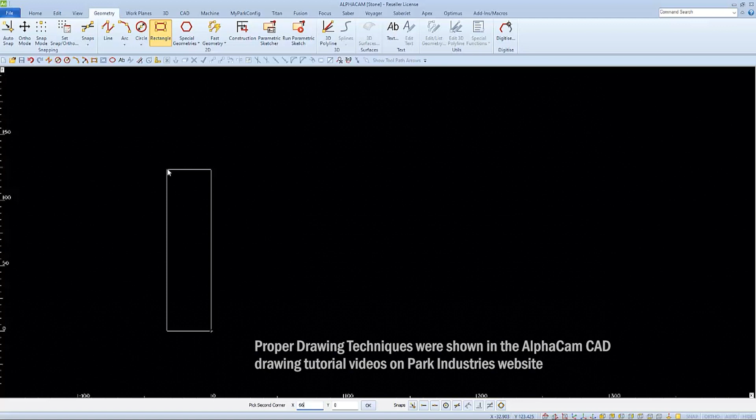I'll draw the parts first, so I'll choose to draw a rectangle, making two rectangles 66 by 26. I'll start the first corner at 0,0, since that's the easiest way to draw it, then type in my dimensions, 66 in the X and 26 in the Y. Then I'll move this part over to the left past the X0 point.

The bottom left corner of the slab must be drawn at X0, Y0. So I'll choose Move, select my part and Finish, then click somewhere on it for a base point, move it to the left past the 0, and click to set it down.

I'll just use Copy to make my second part, and again I'll click and eyeball it into a location right above the other one.

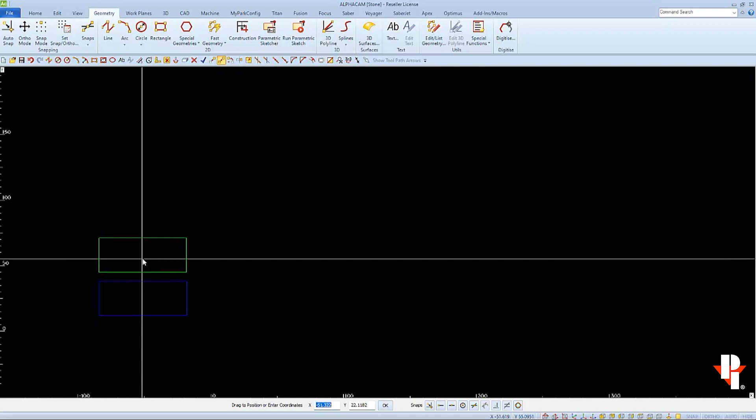I also need to draw a slab, which is a rectangle. That has to start at X0, Y0, and then I can type in the dimensions of the slab, 124 in the X and 68 in the Y.

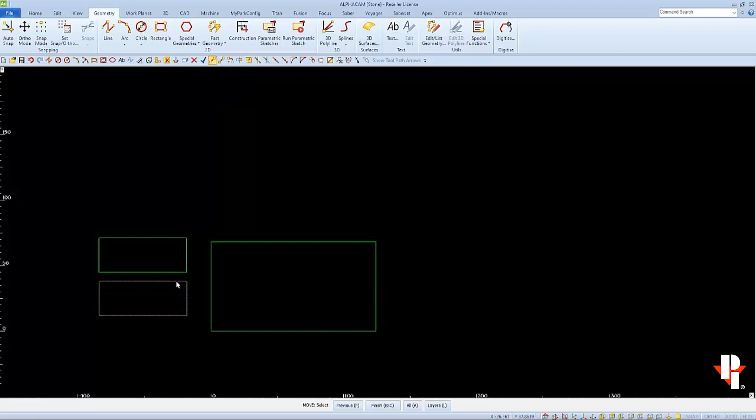Next, we'll move the parts onto the slab. I'm going to move the first part accurately into the bottom left corner of the slab, a half inch away from the edges. So we'll choose Move, select the rectangle and Finish, then use the endpoint snap to select this part by its bottom left corner, and I can set it down at 0.5 in the X and 0.5 in the Y.

It's recommended to leave a little extra material to cut so that the blade doesn't deflect and you get a nice, smooth saw cut for a finish.

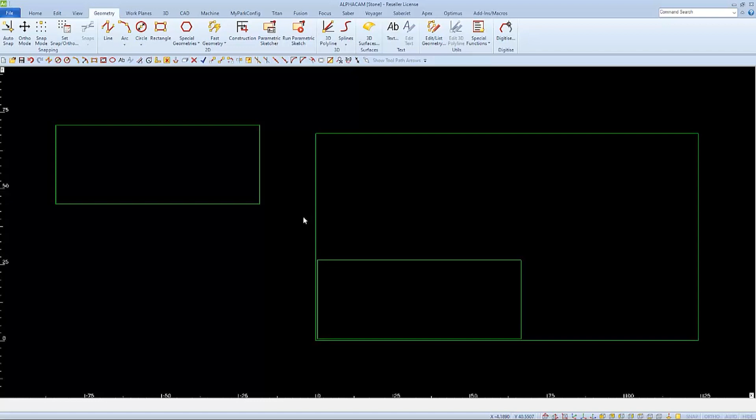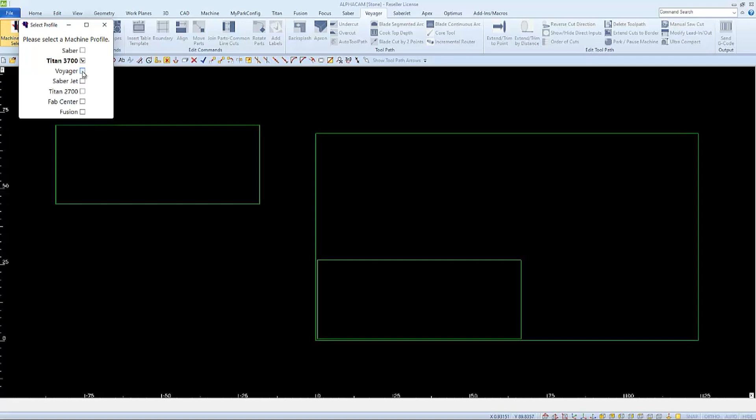I want to move this other part above my first part on the slab. The easiest and most accurate way to do this is to use the Join Parts function from my Voyager tab. If all functions are grayed out on your Voyager tab when you open it, activate it by going to Machine Profile Select and checking the box next to Voyager. This will enable all functions, including Join Parts Common Line Cuts, which we'll choose.

The only setting that we should have selected is Blade Kerf, and then we'll follow the command prompts. My objective is to get this part over onto the slab right above this part, separated by the blade's width.

When it says select the edge of the part to be moved, I have to click closer to one end of the edge or the other. In this case, I'm going to pick closer to the left side of this bottom edge.

And when the command line says select the edge of the part to align it to, I'll not only select this edge, but closer to this end of this edge. We can see not only are the parts separated by the thickness of the saw blade, but the ends are also aligned so that one saw blade cut will cut both parts.

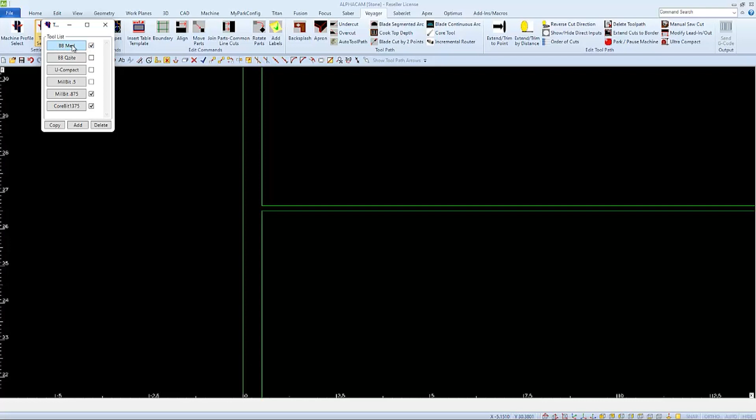This distance of the spacing between the parts comes from the properties of the blade that we have selected. We can view or change this setting by going to Tool Select and selecting the blade that is active with the check mark, and here we can see the blade kerf is set.

At 0.135. So now that we have the parts laid out on the slab, we're ready to make a program. We can apply the saw blade cuts by using the Auto Toolpath icon on our Voyager tab. In this window, we can confirm or change settings.

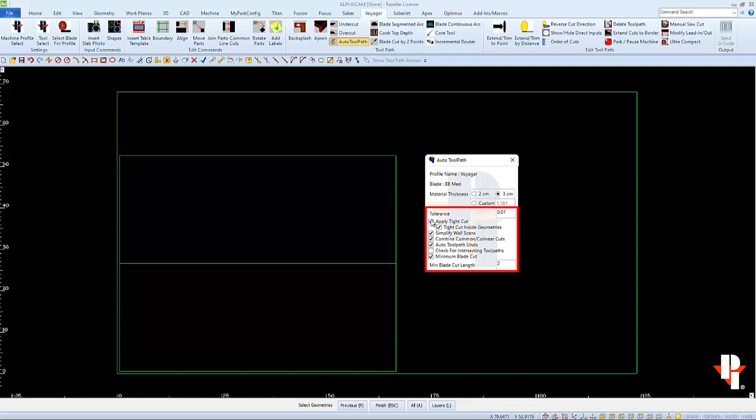The important settings are at the top. We're programming the Voyager, we're using the BB medium blade, and the material thickness is 3 cm. This bottom section is more for preferences, and we'll talk about a few of them as we go along. For right now, you can set it up the way I have mine.

We're prompted to select the geometries to cut, so I'll select my 2 parts, and then I'll finish to automatically have all my saw cuts applied. These blue tool paths represent the middle of the bottom of the blade, and the arrows will show you the direction of the cut if you have them turned on above.

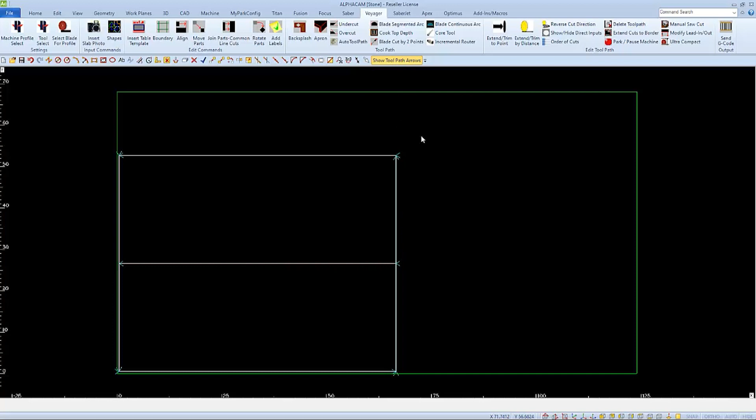Another thing I'd like to do in this first example is save the right side of this slab as a pre-cut for another job. I can do that by extending this saw cut all the way to the edge, which is easily done with Extend Cuts to Border. Follow the command line.

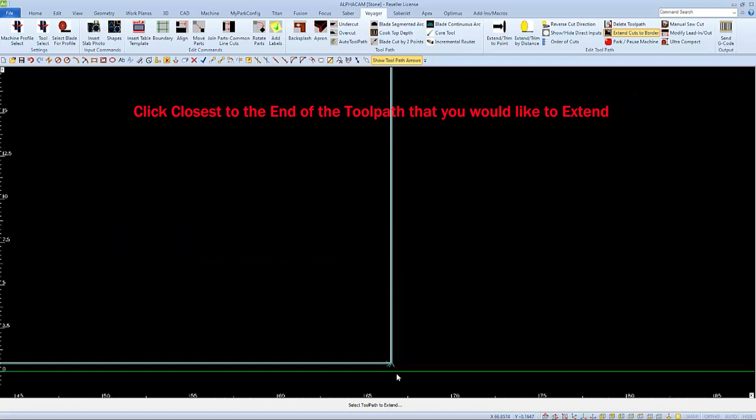First, select the border, which is the edge of the slab. Then you can select the toolpath to extend, and select which end of the toolpath you want to extend. I can click on this end to extend this way, and this end to extend this way.

After extending all the cuts we wish, we have a good program that could be run at the machine. In order to run it at the machine, we'll first need to save it as a file name, which will become the program name.

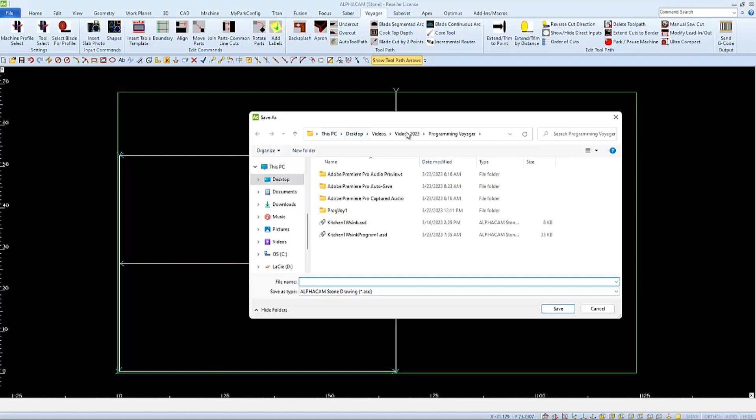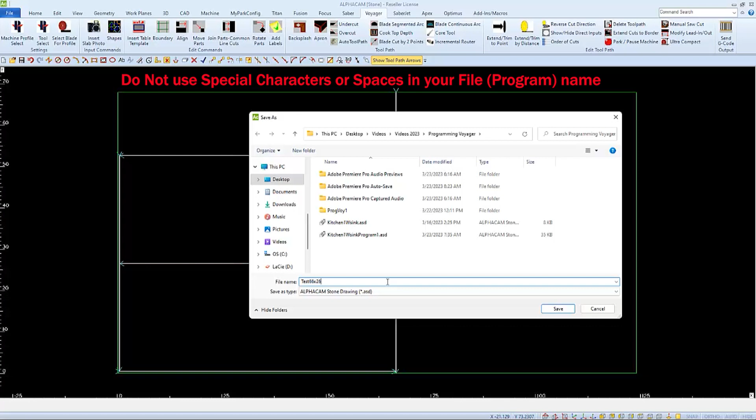Save your program drawing into a dedicated location. I've created a Voyager program folder to save mine in, and I'll just name mine Test 66 by 26. Do not use spaces or special characters in your file name.

When we click Save and OK, our drawing now has a name, which will become the name of the program. If the Voyager is connected to the network and all set up and ready, a program will be created and sent to it when we press the Send G-code button.

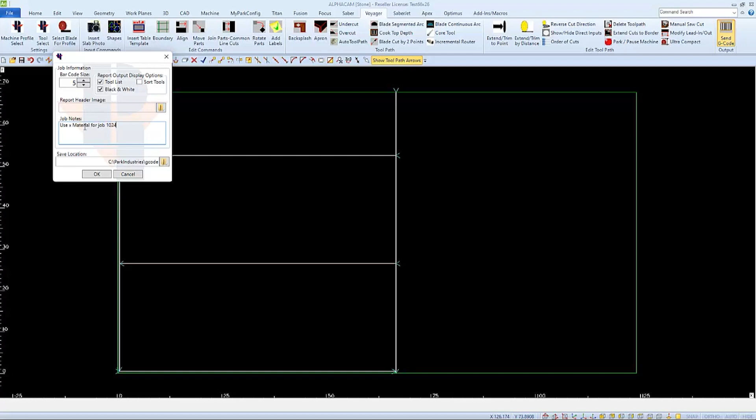Here you can add job notes if you wish, maybe what material to use and for what job number, which will be displayed on the job sheet when you press OK.

We'll see the program name, which is also displayed as a barcode, which we can scan to load the program at the Voyager to run it.

We also see an approximate runtime. This program is a little over 5 minutes. This is often printed off and brought to the operator to ensure they run the correct program.

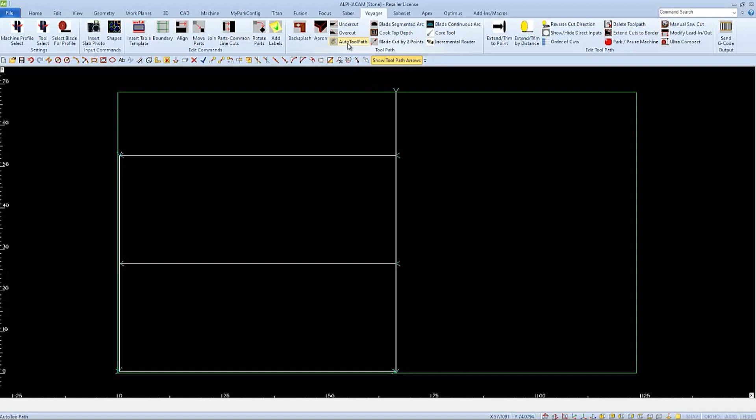Let's make another program. This time we'll add 2 more of the parts for a total of 4. We'll start by undoing the toolpaths that we have for the 2-part program. This is easily done by clicking on the Auto Toolpath icon, because we have Auto Toolpath Undo selected. So now, when we click on Auto Toolpath, it undoes all the toolpaths that were already applied.

Now I can easily make 2 more copies of the part and set them off to the side to make a similar program with 4 parts instead.

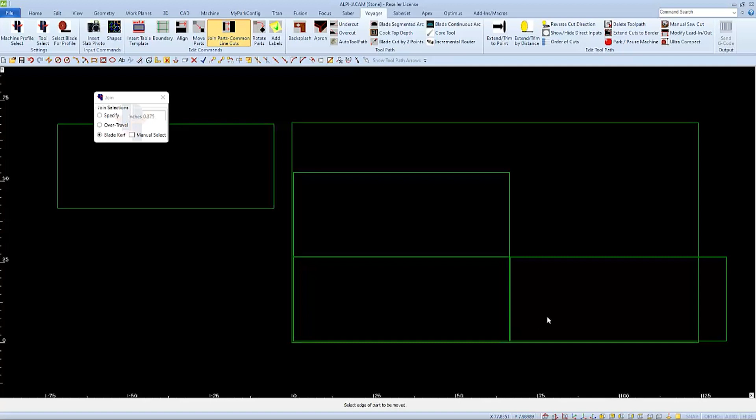I'll use the Join Parts-Common Line Cuts feature again to move the parts onto my slab, choosing to keep them separated by the blade kerf. As prompted, I'll select the edge of the part to be moved, clicking closer to one end, and then select the edge of the part to align it to, again selecting closer to one end. As we see, the part doesn't fit on our slab in this orientation.

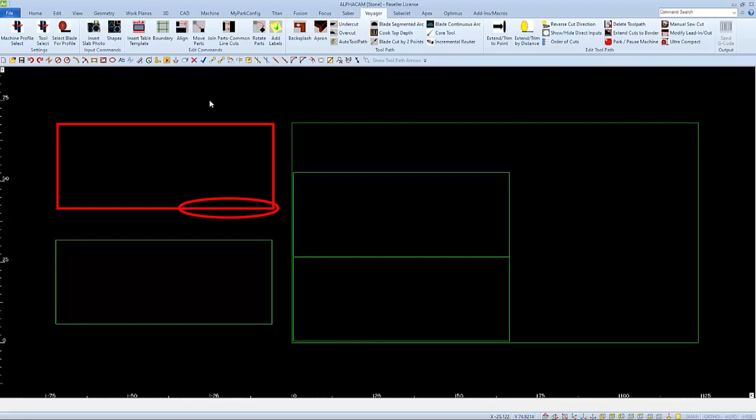So I'll undo this move. I can either pre-rotate the parts, or rotate them while using my Join Parts-Common Line function, by selecting the proper edge and end of the part I want to move to the end and edge of the part I want to move it to.

So I'll choose Join Parts-Common Line Cuts, and leave just Blade Kerf selected, and pick this end of this edge of the part to be moved to this end of this edge to align it to. For the next part, I'll choose this end of this edge to go to this end of this edge.

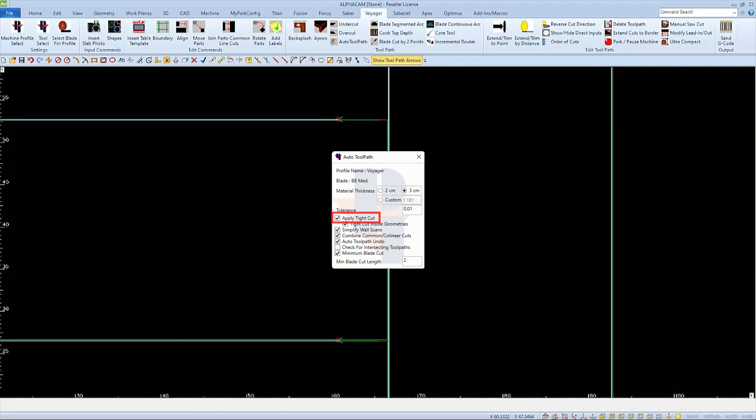I'll finish so that I can choose Auto Toolpath, then select the 4 parts and finish to create another program. Like before, all the toolpaths are automatically applied, including these 2 tight cuts since we have them selected in our Auto Toolpath menu. This is where the blade will stop its X or Y travel and plunge into the table so it can cut closer to the end of the part.

I'm going to take us to a side view drawing that I made so we'll have a better visual and understanding of what happens here. The beginning or end of the blue arrow represents the middle of the bottom of the blade. And we normally see this arrow go all the way to the end of our part, which completes our cut.

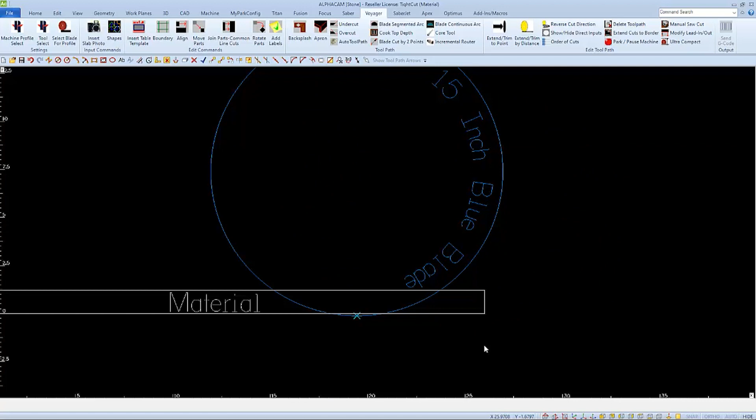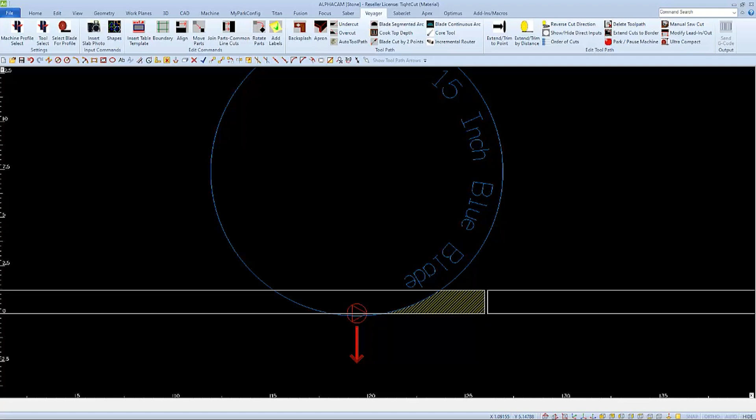But if there's another part next to it, like we have in our current layout, the blade would cut into that. So therefore, it has to stop short, which would leave an amount of material that wasn't cut. This red symbol of a triangle inside of a circle represents a tight cut. A tight cut will plunge the blade into the table so that it will cut considerably closer to the end

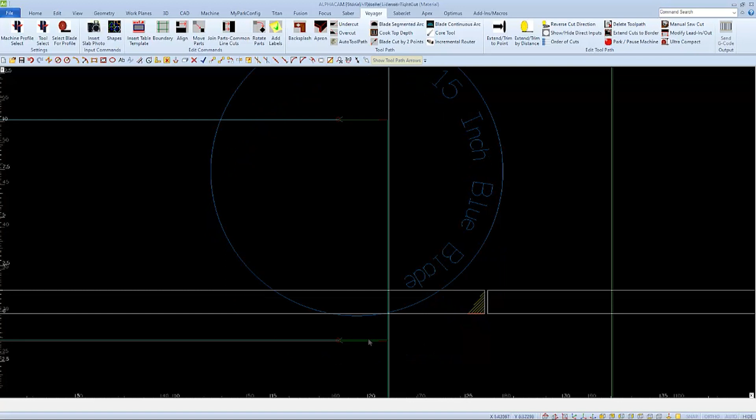of the part. With the parts close together, like we have, there still will be a small portion that doesn't get cut all the way through. This is represented with a red line. So when we see red lines after we've auto toolpathed, it is showing what the saw blade was not able to cut. It's usually a small amount if it's on a straight edge like this one.

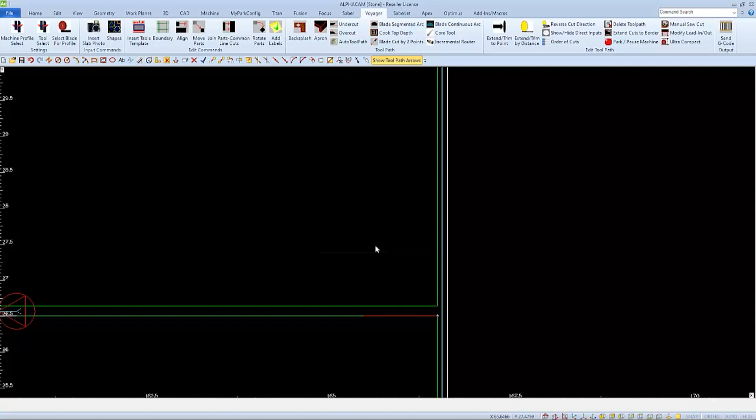I'll measure the distance from the end to the end, and it's a very small distance, less than 1 1/8 inches. And if we ran the program like this, we would have to manually finish the cuts. But there are a few different ways to change the program so the Voyager will cut through for us. I'm going to move the 2 parts to the right by about 1 1/8 inches since I have extra room over on the right side.

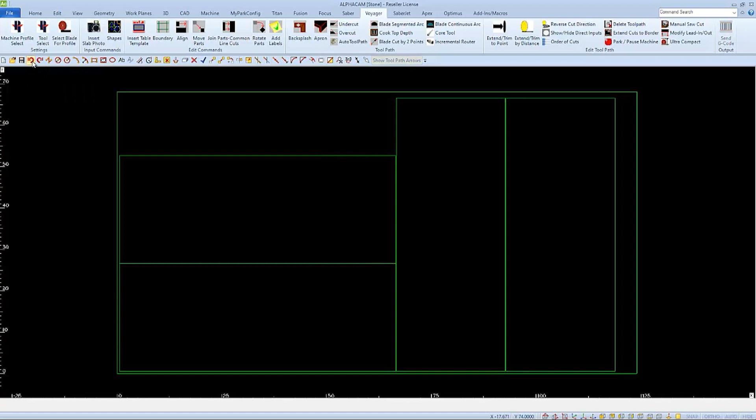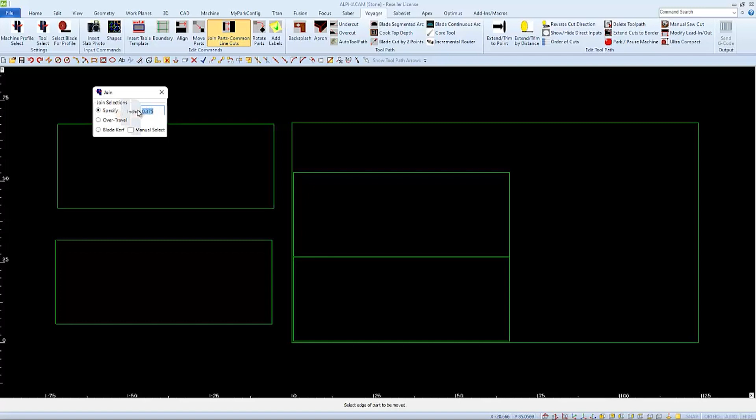In order to change a program, I first have to remove the cut paths. I'll choose regular undo this time since it was the last thing I did. And I'll press undo twice more so the last 2 parts are back alongside the slab. And this time, when I use Join Parts-Common Line Cuts, I'm going to select to specify the distance between parts instead. The distance we measured was just under 1 1/8 inches, so I'll use at least that much.

And like before, I'll follow the prompts. I'll select this end of this edge to be aligned to this end of this edge, which still left the bottom edges aligned and also left us a 1 1/8 inch gap. This next part, I'll switch back to the blade kerf so the 2 parts will share one cut.

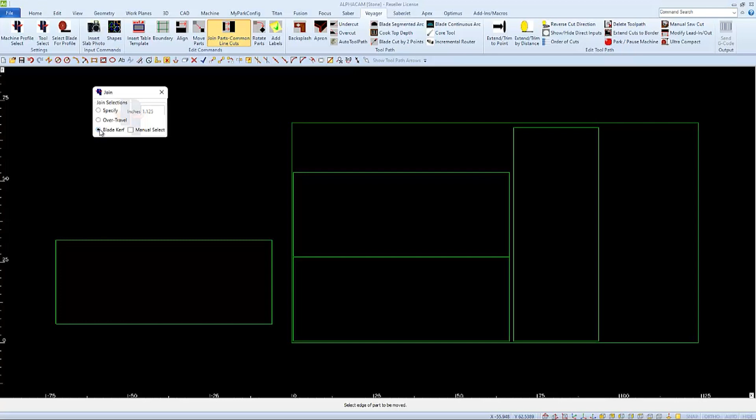Following the prompts, I'll select this end of this edge to go to this end of this edge, to align these 2 parts as they were before, a saw blade's width between them and aligned at the bottom. And we can make a new program by choosing Auto Toolpath, selecting the 4 parts, and then finishing. And as we hoped, these red lines are gone, and since there's no red lines in our entire drawing, it means all 4 parts were completely cut through.

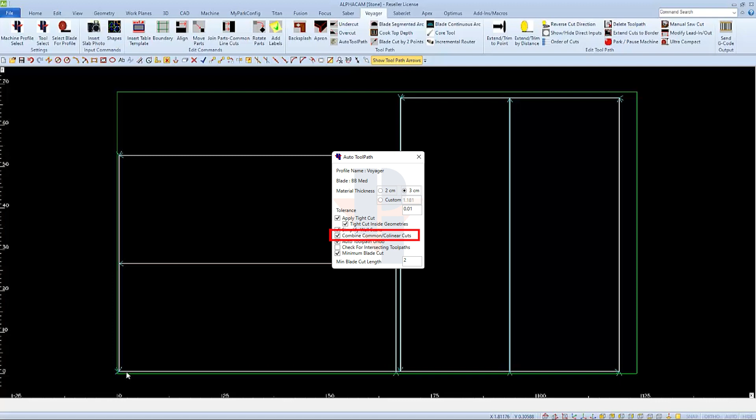And this is a perfect opportunity to show what Combine Common/Colinear Cuts does when it's enabled. It made one common cut across the bottom of all 3 parts rather than making 3 individual saw cuts. And with them all applied, we can go extend cuts to the border if we wish. First select the border as prompted, and then select the end of the toolpath to extend to the border.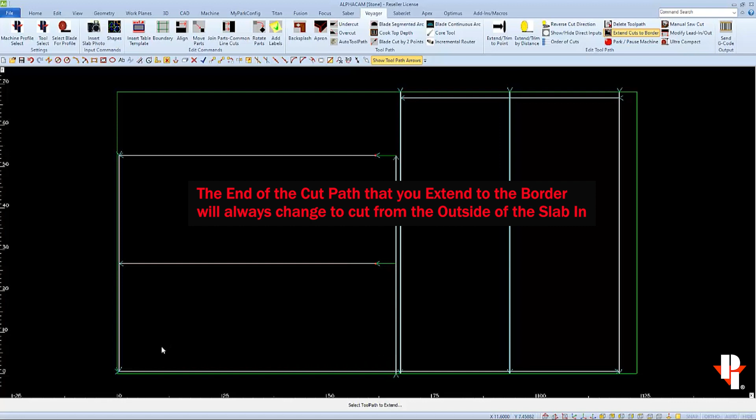And if you click a toolpath randomly a second time, it will automatically extend the other end, which may come in handy sometimes when you want to extend both ends just by double-clicking on the toolpath. But be very careful and select the correct end if you're only extending one end so it doesn't go across a good part. And don't extend the end of a toolpath that has a tight cut applied, or it will remove it. So let's save this file as a different name so we can complete and send the program.

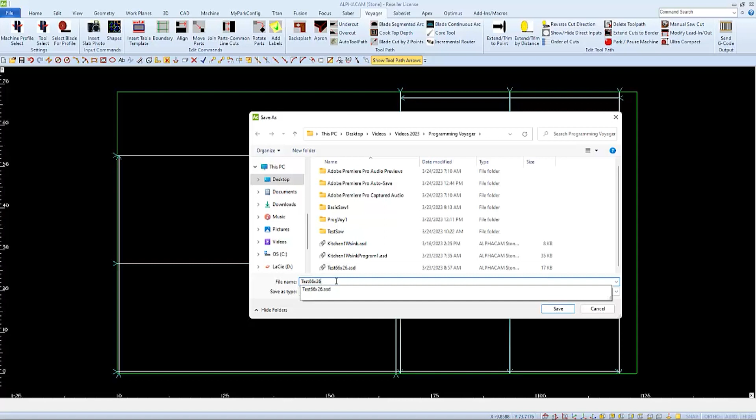I'll just use the name test 66 by 26 and add quantity 4 to the end. And now we can output the program under that name. And you can type notes if you wish before you click OK to make the job sheet. It may take a minute to generate this job sheet, especially if it's the first one.

And here, like before, we can see the approximate processing time, a picture of the layout, and the name saved as a barcode across the bottom. Paying attention to the orientation of your parts can increase the yield and reduce runtime.

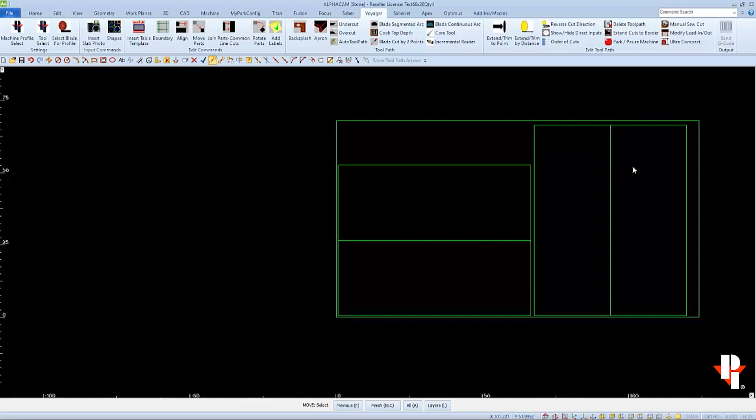I'm going to change the layout of these 4 parts for what I believe is the most efficient. I'll undo the toolpaths, and then I'll move all the parts off of my material. I'm going to place all 4 of my parts with the vertical orientation like these accurately on my slab.

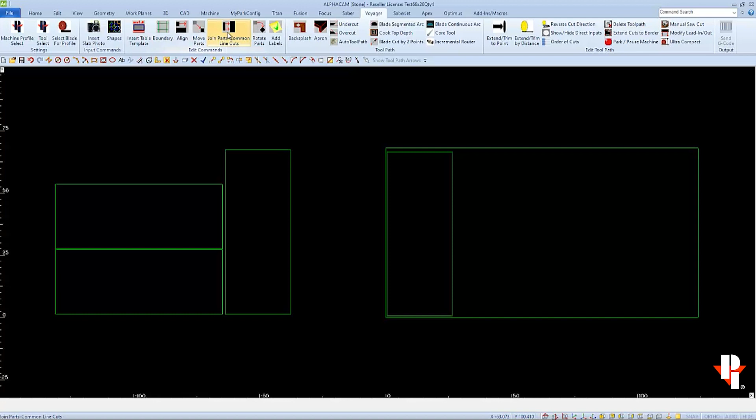I'll start by choosing Move, selecting one of the parts, and then grabbing it at the lower left corner as the base point and setting that down at 0.5 and 0.5. And then I'll use Join Parts Common Line Cuts to move the other 3 parts in a vertical orientation separated by the blade's kerf. I'll select this end of this edge and align it to this end of this edge.

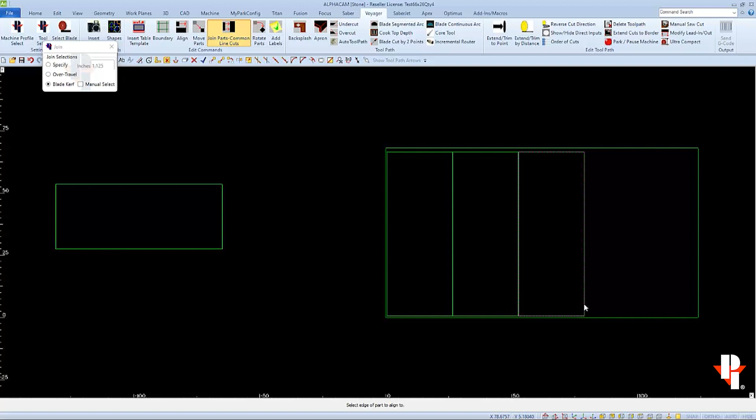And then I'll select this end of this edge to align it to this end of this edge. And finally, this end of this edge to this end of this edge. And like before, I'll apply my toolpaths by selecting Auto Toolpath, selecting all 4 parts, and then finishing.

With all the saw cuts applied, I can extend them to the border. Choose Extend Cuts to Border, then select the border as prompted, and then the toolpaths I wish to extend. I'm clicking twice on each of these vertical toolpaths to extend both ends to the border. And there are still some cut paths that I want to be particular and only extend one of the ends.

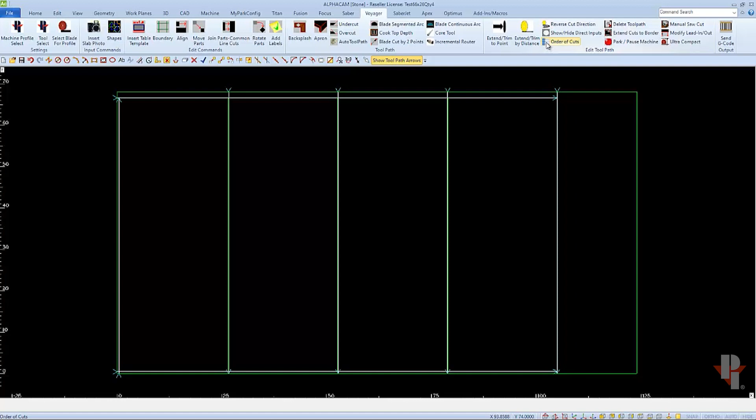Another thing we can do is view or change the order of the cuts. If we turn on Order of Cuts, we can view them in this Operations panel. You may have to expand Operation 1 to view the saw cuts within it. And the cuts are displayed in the order that the Voyager will run. You can view the order by clicking on the first saw cut, and you should be able to see it change color on your screen.

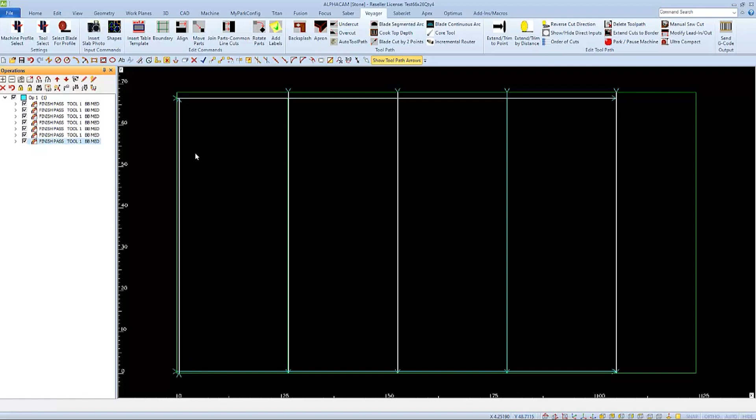And you can either click on the second one or start pressing the down arrow key on your keyboard to view the order of the saw cuts. You can also change the order. I'm going to change the order to cut the long edges of the parts first. And then I'll order the vertical cuts from left to right.

First, I'll find the cut by going to Find, and then as prompted, I'll pick the cut from my drawing. This highlights the cut in my Operations panel, and I can use the red arrow to move it to the top. And I'll repeat this process. Find and select the cut, and when it's highlighted, I'll move this one to be cut second. And I'll repeat this procedure for as many cuts as I wish.

Changing the order of the cuts may help with keeping the parts from moving while they're being cut at the machine. When you're satisfied, you can click on the top cut and press the down arrow on your keyboard to review the order.

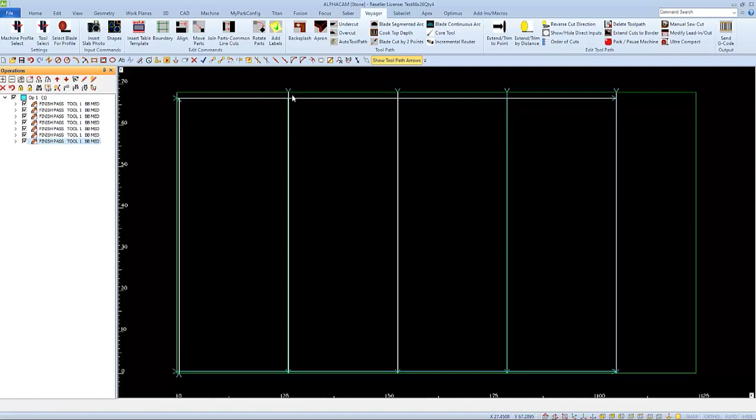Another thing we can do is change the cut direction. I'll change mine so it goes back and forth on the vertical cuts. So I'll select Reverse Cut Direction, and then as prompted, I'll select the toolpaths I wish to reverse. So if I'm going to go in a zigzag fashion, I'll reverse this one and this one.

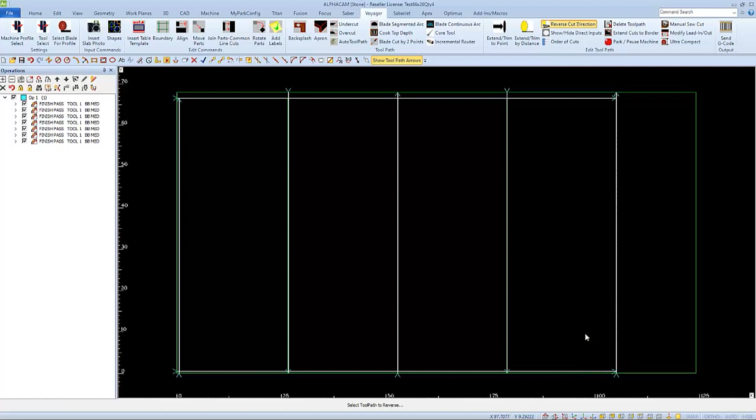And now I can send G-code again to create a new program. You should always File Save As to create a new name for a new program. If you forget, like I'm going to, it may cause some problems. I'll send G-code and skip the notes and just click OK this time.

And one of the problems I may see is this message, which means the PDF or job sheet is still open, so it can't be saved under the same name. If I go to my Windows taskbar, I can see that I still have this file open. So the resolution is to close it, and then I can send G-code again so it can reproduce the job sheet.

And with this refined layout, I can see that I've reduced my approximate processing time and am still creating a good program to finish my 4 parts.